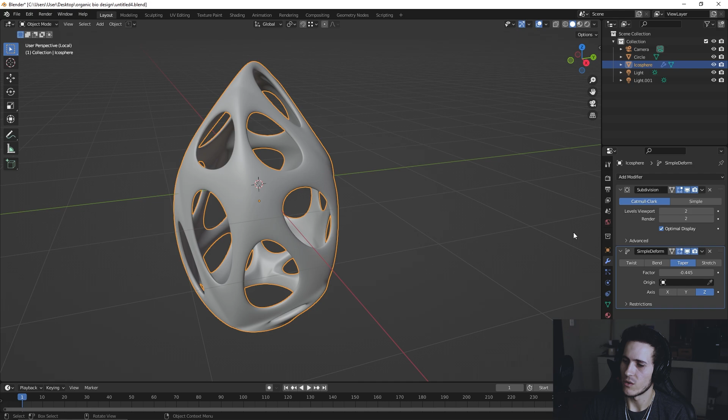For instance, this one—if your modifiers are not applied, it's not going to go into the slicer software, into the 3D printing software. So you must apply all of these. Apply, apply. And then you're going to go look at your geometry.

What it's going to do is turn all of these faces into triangles. But you don't necessarily want minimal vertices, because then in the printing mesh you'll see the actual faces with the angles, which you don't want. If you have too many vertices, it's not going to work either.

So the best modifier to tackle this is the decimate modifier. I don't think we need to decimate this one, but we can anyway. It's got 155,000 faces, so this one is okay.

So you're going to click triangulate, so you can already see if it's going to cause any issues. When you go to 0.5 it remains the same, so you want to go to 0.3 or 0.2. I'm going to try 0.3. This is obviously going to take some time.

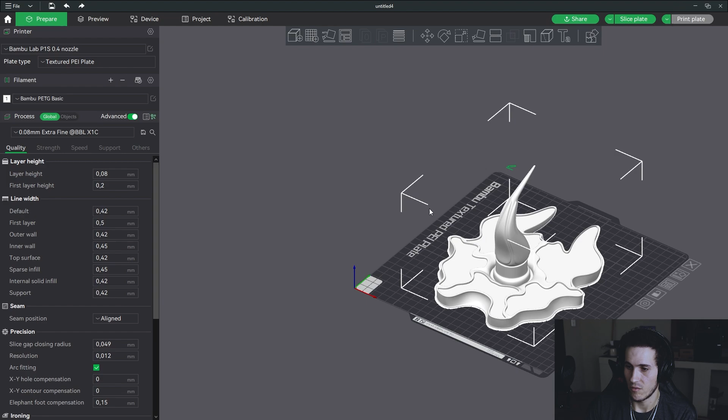So let's go into the slicing software, and you're going to go file, import, and take the bottom piece, and you'll see it fits nicely on there. Okay, so that's 100%, that's all we need.

Okay, so we got that one over there. And then for the second one, you're going to say file, export STL, call this the top piece, selection only again. Okay, file, save as.

Okay, so everything is cool here. What I'm going to do is use two different materials, two different colors, because I have two strands of silk filament, even though the gold one is nearly finished. The silk has a nice glossy finish, so I'm going to print the top piece in gold and then the bottom piece in silver.

So what I'm going to do is go to the PLA silk setting, use a layer height of 0.08, and leave all the other settings the same.

The only thing here is that I have the Bambu P1S, so this is a much faster printer than other 3D printers. But if you want the silk finish on the edges, you do not want to run at those fast speeds.

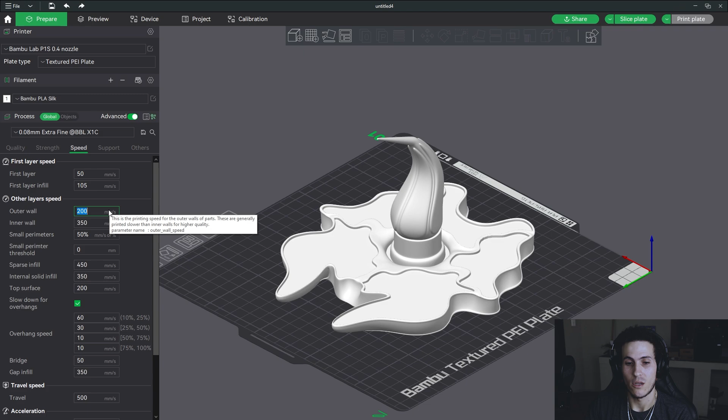So the outer wall, you're going to change to 50 millimeters per second, and the top surface you're going to change to 50. Those are the two you're going to change.

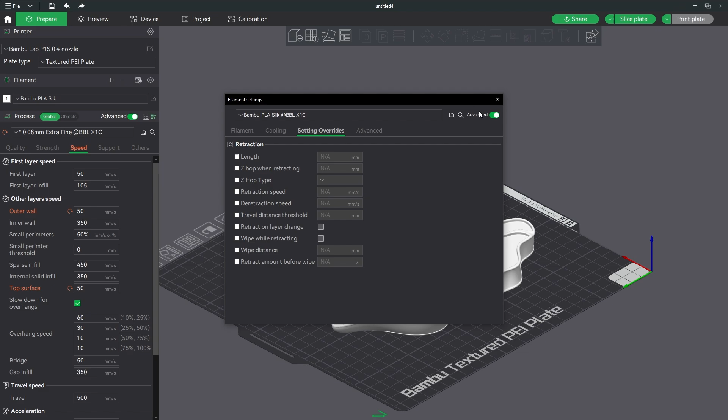And then sometimes if it's not printing correctly, I'll go to the settings override and change this length, the retraction - not the retraction speed, the length. So the retraction length from 0.8 to 1 if it's causing some issues. But yeah, I'm just going to leave it like that.

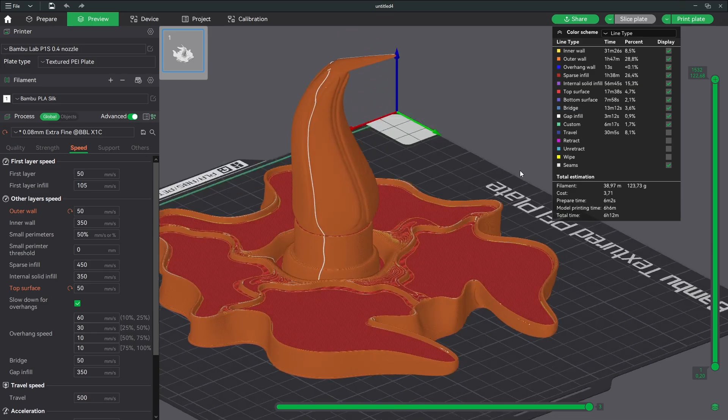You're going to go to slice plate, and there we go. This is what it looks like. Now, mine does not need any supports, which is awesome - it literally needs no supports. You see these blue spots at the bottom? That means this thing is going to print just fine without supports.

But if you have any, because sometimes these things could overlap - look at this, here it's going to need some supports at the bottom. I'm actually lying, it does need some supports.

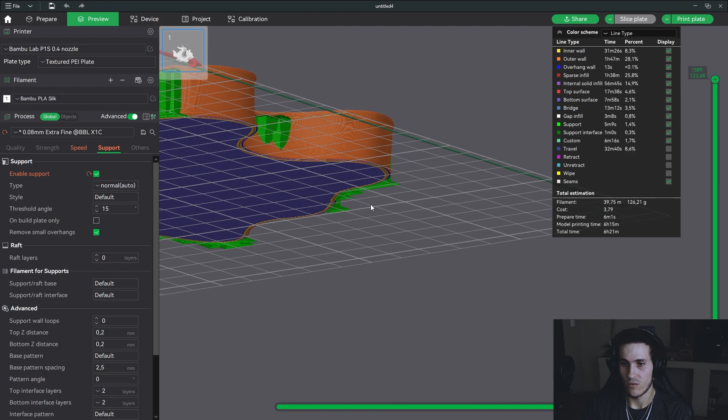So what I usually do - I know there's the tree support, which is cool, I used it a lot in the beginning, but it just tends to break. You can add more supports and make more dense ones, but I've seen the normal supports work very well and come off very easily. So I just use the normal, and you can see there it's giving some support for these overhangs on the sides. Okay, so you have some supports, and that's going to be cool.

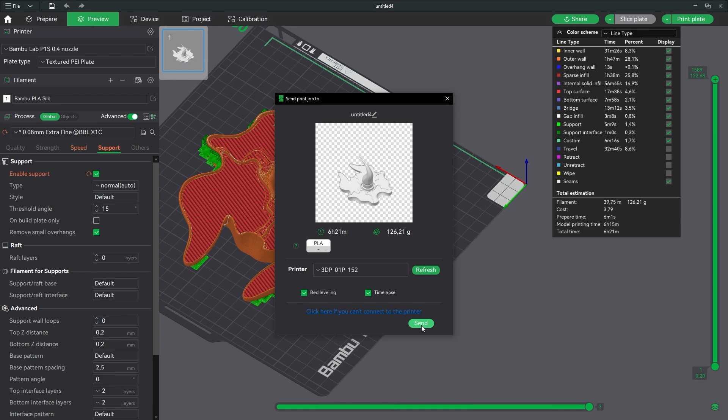And you're going to go to your print plate. Able to go to refresh, and you'll see your print over there. Everything looks cool, so mine is going to take about 6 hours, which is perfect.

So as you guys can see, this is my printer, my Bambu P1S, and this thing is pretty fresh. I'm not even going to lie, this is one of the coolest things I have purchased in my entire life. It's like real life magic.

And then I purchased some material as well. I got a few rolls, and I'm going to show you guys how to change the filament, how to do that.

Load, unload, or retry. What you can do is click unload to remove this filament. Right now I have PETG, like a transparent color.

So you can literally just pull this filament out. You just want to hold onto it at the top so it doesn't just spiral out - like exactly what happened now. I'm showing you what not to do. Imagine, I'll just tell you - anyway.

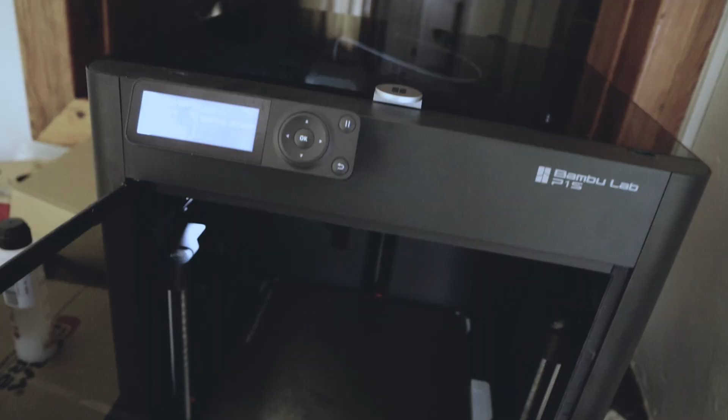Okay, and then what you want to do is load the spool at the back. Press load, okay, just want to push it in, and it is doing that. So once that's done, you'll see it's like silver coming out, so it's a proper filament. Here, it's going to go - done.

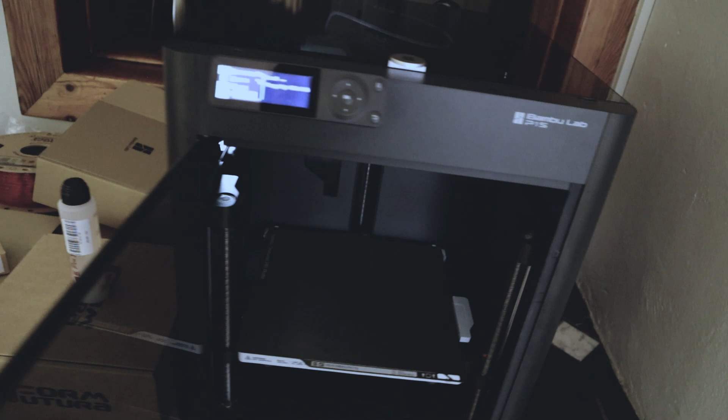Okay, so we have our new filament put in. The other thing is you want to get some of this - this is like magic. This glue, whatever it is, apparently it works in a manner where when it gets hot, it sticks, and when it gets cold, it lets go again. So while your plate is hot, while it's printing, it's going to stick nicely, and when it's cooled down, it's going to come off nicely.

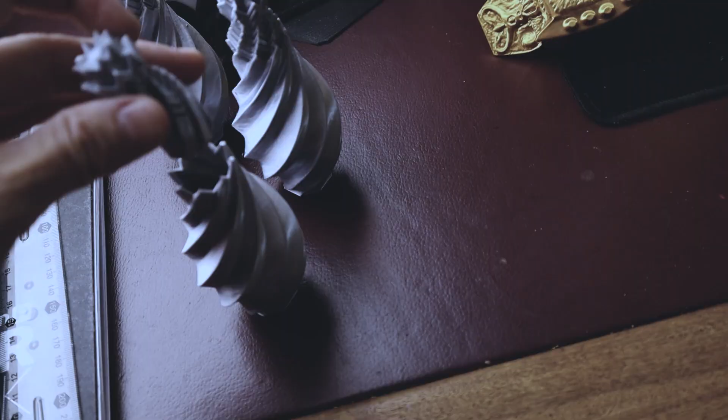Like this one can open up, right? And then it's got like a lock mechanism because it goes into the side. So pretty cool, I got 3 of these.

Look fancy. And then I have this failed print - the sides came off there, but the rest of it looks pretty cool.

And then I have a car part as well. This is like just a light, where the light goes. Obviously this is just a support, but this is also going to be sprayed, and then it's just put by the light section, sort of the top of your car, where the light goes. Because his light came off and they can't find a part for his car. So I mean, that's pretty efficient, hey?